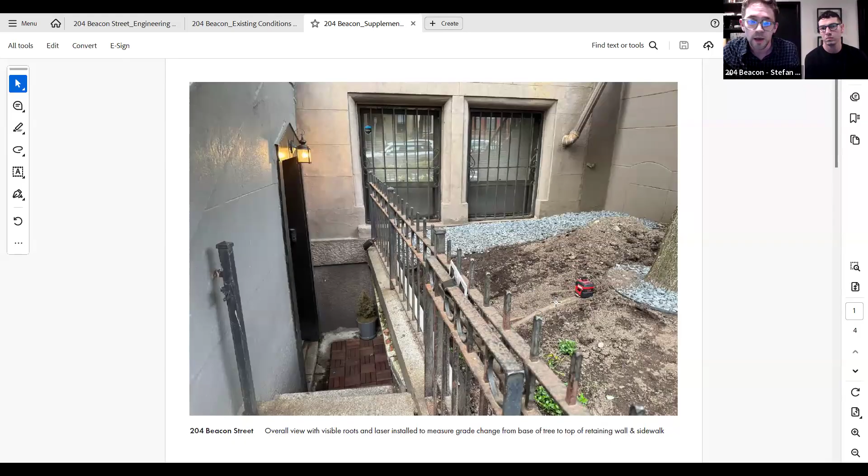After our conversation with the neighborhood association, we swept aside some of the soil to reveal the roots, because there was skepticism about how the tree was potentially contributing to the wall. We were able to identify specific roots from a larger, wide-spreading, shallow root system that extend perpendicularly from the tree's base to the wall over a span of roughly 4 feet, then hit the wall and turn to run laterally along it. We assume there may be other contributing roots here, but these are the most prominent.

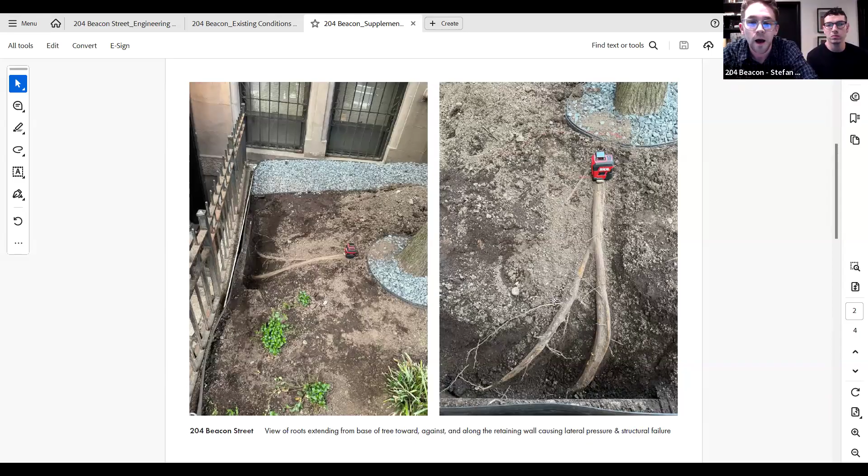Beyond that, what we wanted to identify here speaks to the original planting of this tree, which seems to have not been properly done, or over time since its planting has become neglected prior to our involvement with the condo association, moving in roughly a year and a half ago. There's a grade change from the tree's root collar to the top of the curb, to the top of the retaining wall, of roughly 10 inches, so just over 20% slope over 4 feet.

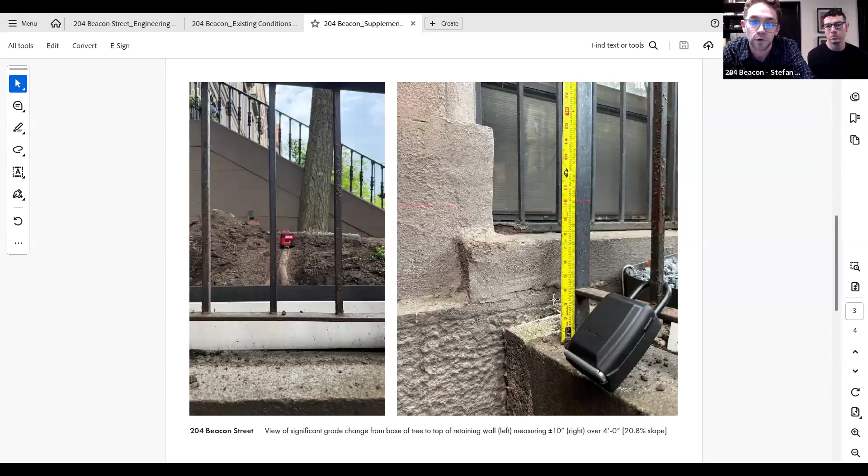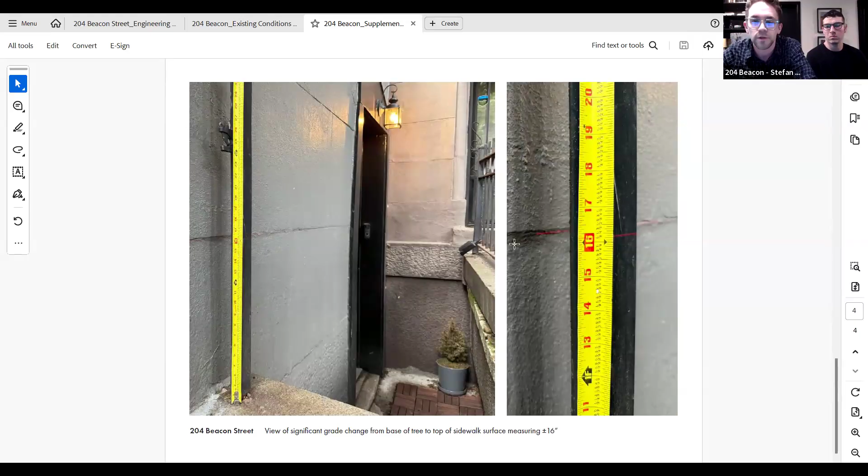In addition to seeing the roots physically touching the wall, this additional pressure we can only assume is contributing more so to the wall's failure. Beyond that, there's an even larger jump from the top of the roots to the adjacent sidewalk of 16 inches. So that was some supplementary information we thought was relevant after our conversation with the neighborhood association.

And I also want to share the video. Apologies if it's loud, I don't know how to control it. But basically, as a preface to this video, we've identified that there are some areas of existing mortar, which, in speaking with a structural engineer, were identified as being a last line of defense keeping this wall upright. Later in the video, you'll see where the most problematic area interacts directly with the tree roots just beyond.

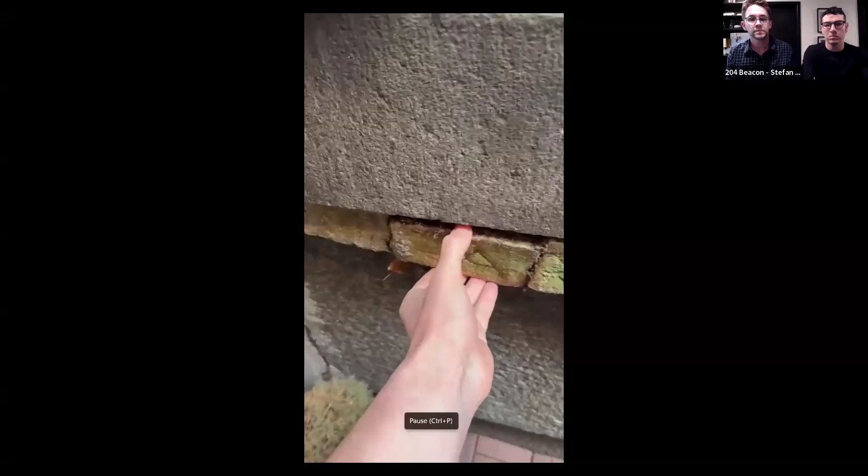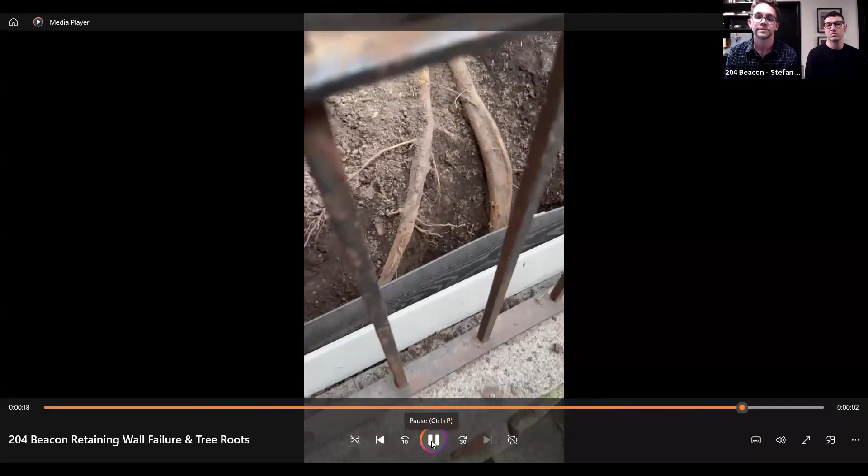Another thing, in addition to the photos, stepping back to when we spoke with the neighborhood association, we completely understand the rationale for wanting to save the tree. I think in any other scenario, we would agree that it's certainly worth pursuing.

But what we have learned in our discussions with the structural engineer and with the management company here at 204 Beacon is that, in order to save the tree and address the retaining wall, there would need to be some trenching along the length of the existing retaining wall to properly rebuild, stabilize, and restore it, and there would be a little bit of trenching at the foundation of the building as well. That trench would be cutting back—I'm not entirely sure the specific width, but it was thrown out as maybe a 3-foot path—so we'd be manipulating the tree's root system in some fashion.

In our conversations with Tyler, the arborist who submitted the quote for removal, he identified that while he can't speak to the subterranean conditions—he'll leave that to the structural engineer—this particular species and tree has wide-spreading shallow roots. Because of the dramatic grade change, a decent amount of that root system would be cut away in addition to the trenching.

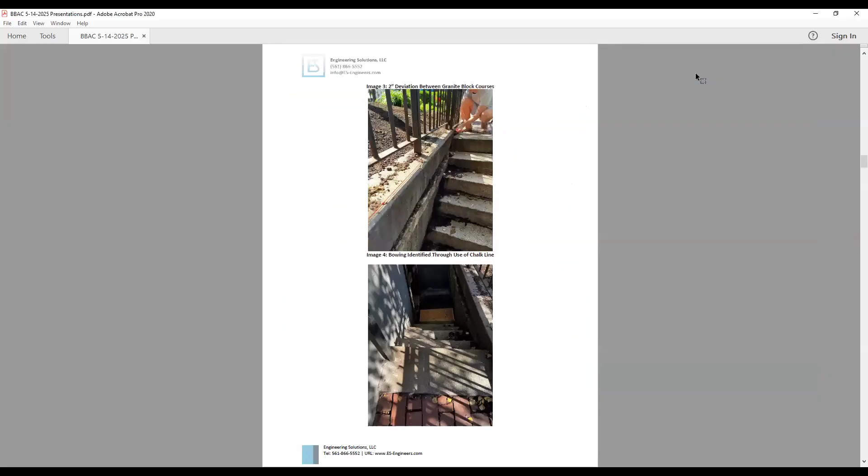And what we're fearing is, if you think about looking at a plan view of the tree, one other thing that we noticed was there is some type of waterproofing issues happening on the wall, the facade of the building itself. So we have two quadrants of the tree: one is the site wall, and the other quadrant is up against the home. So if you dig back all of that soil and possibly have to remove some of the roots.

We fear that the tree might become unstable. And in addition to that, it's already leaning towards the sidewalk and away from the house. So this is one of our biggest concerns: life safety. If during the process of trying to remove that soil, any of the roots were to get damaged, then this thing could actually collapse towards the people walking on the sidewalk.

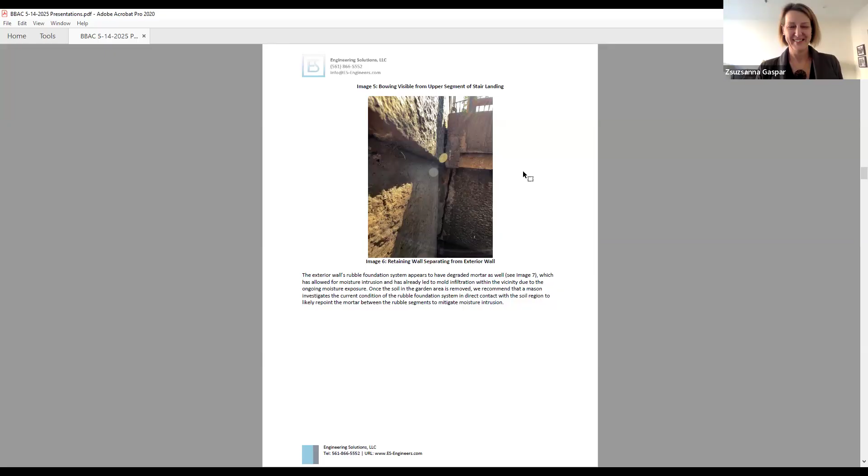Is there someone here from 131 Commonwealth Avenue, please? Hello, yes, this is Ryan Nevidomsky with Catherine Truman Architects, and we also have Adam Frost Wiley with the owner's rep. We are here for 131 Commonwealth Avenue.

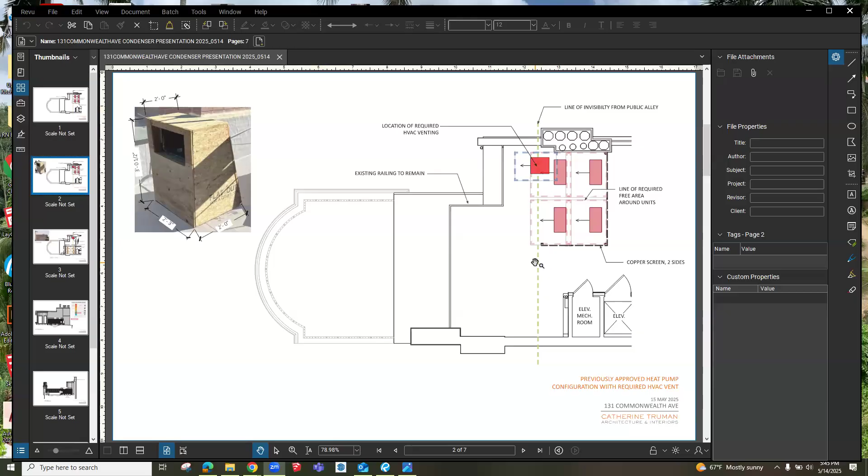Can everybody hear me okay? I apologize, I am on the road, so I can't turn my video on. But on behalf of the owner, what I wanted to do was acknowledge that we know that this has previously been before you and a decision was made, and we really don't want this to come across in any disrespectful way that we're coming back and trying again for a different approach.

What sparked this was a mechanical conflict with a vent that had to come up, and Ryan will get into this, but we had a vent that had to be placed out of sight, right in the middle of the previously approved location. This caused us to rethink, is there a better solution?

Our first thought was to go back to our preferred layout from before. With the help of the neighborhood association, we had a meeting with them last month, and we realized that coming back with our previous solution would in fact be disrespectful, since you'd already spent time reviewing this. So I really want to make the point that we appreciate everybody's time, we appreciate the process and the system in place, and we by no means would have come back if we didn't have a conflict.

I do think the silver lining may be that it works well for everybody, and most importantly we wanted to express our observation that there's a good system in place. We didn't want to come across as disrespectful for coming back with a new idea. So with that, I'll hand it over to Ryan.

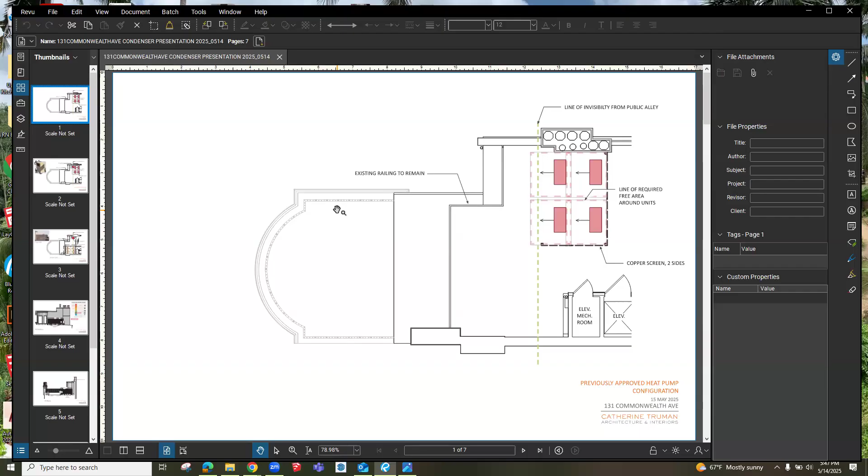Thank you, everyone. I'll be here to comment as needed. Thanks, Adam.

So previously, before we had this quad layout of HVAC units, this was what was previously approved against the east chimney at the roof deck. These were slated behind the line of visibility with a copper surround at the two sides.

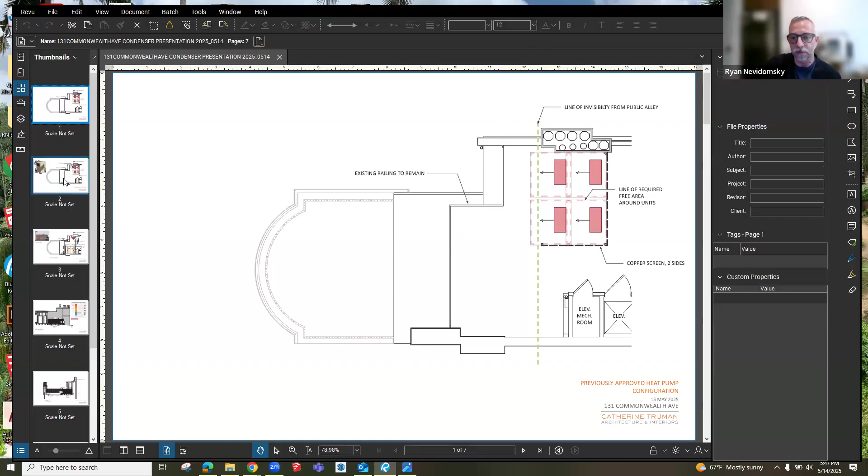What happened is, because of some of the ductwork routing and venting that needs to happen with the HVAC system, they had to come up with a roof exhaust within the clearance requirement for these units. Adjusting those to the right or down starts to impact the access to the elevator mechanical room and the elevator itself, so we needed to look at a different way of laying this out, or a different location.

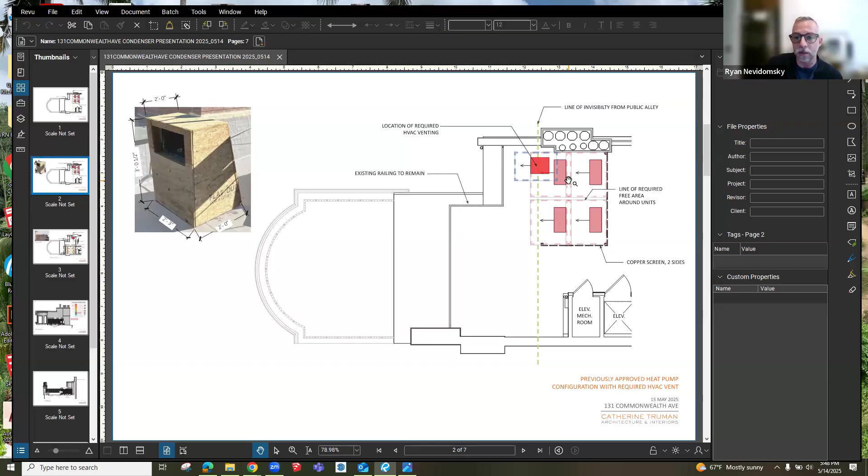What we ultimately decided to do, with a little help from the NABB, is orient it down against the west wall, again enclosing it with the same copper enclosure that is being done at 161 Commonwealth Avenue.

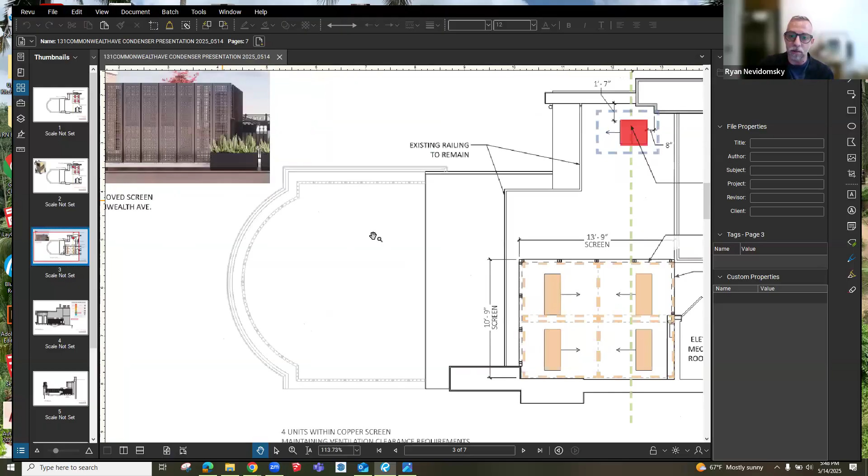This keeps it lower so it's not high and visible when you're way down the alleyway. It keeps it away from our access to the mechanical room and elevator, away from the grill and deck area we want on the other side of this deck, and away from the HVAC vent that had to come up through the roof.

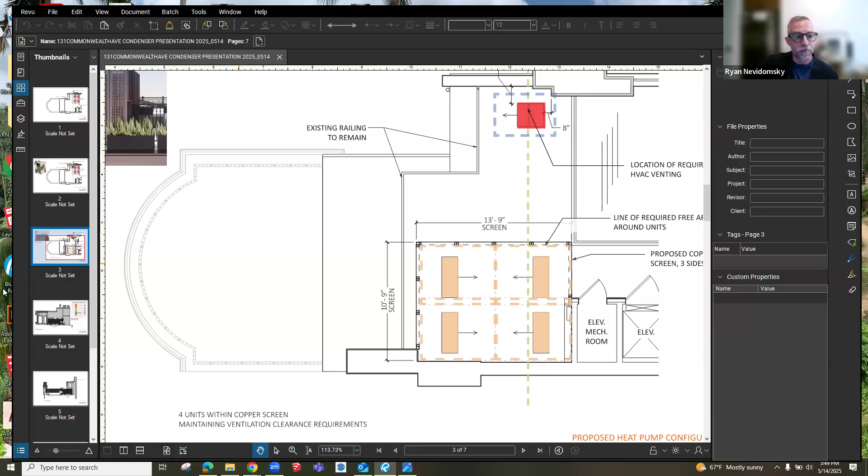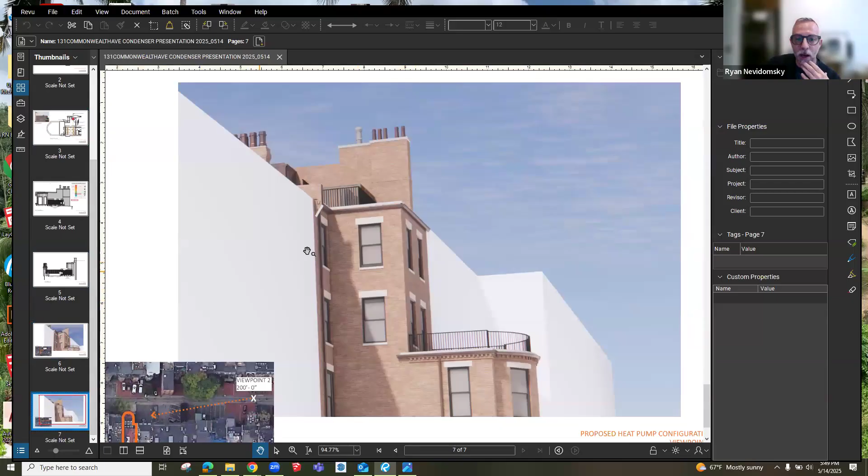What that looks like, and you've all seen the mock-up, is this. When you're actually close to the building, at 85 feet away from the back of the building down the alley, you don't even see the screen popping up above. It's when you're at about 200 feet away from the building, basically the shot Joe was showing earlier, that you do see the screen popping up above the railing back there.

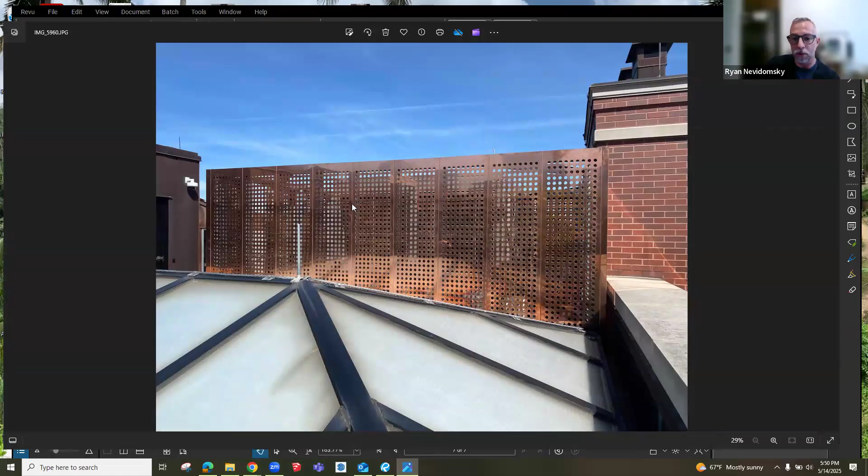This screen would be perforated copper, and it's going to patina into a nice copper color. It's perforated so you do see through it a little, but it's not too bad in visibility. I have a couple photos from the one going in at 161 — this is up on the roof, so you get a direct view of it, but it does a pretty decent job of screening and looking elegant without being overwhelming.

Can I just ask a question on that? When we approved the screen at 161 Commonwealth, Rob made a motion with provisos to make sure it did in fact screen the mechanicals so you wouldn't see them. I've taken a look at the photographs, and that screen is very see-through — you can see the mechanicals because the sky shows through it, and it's too chicken-wiry. I'm concerned the same effect will happen here, that you'll have a busy grid where you can still see the mechanicals, as opposed to a simple solid copper screen, like standing seam copper. Is there any operational reason that's not possible?

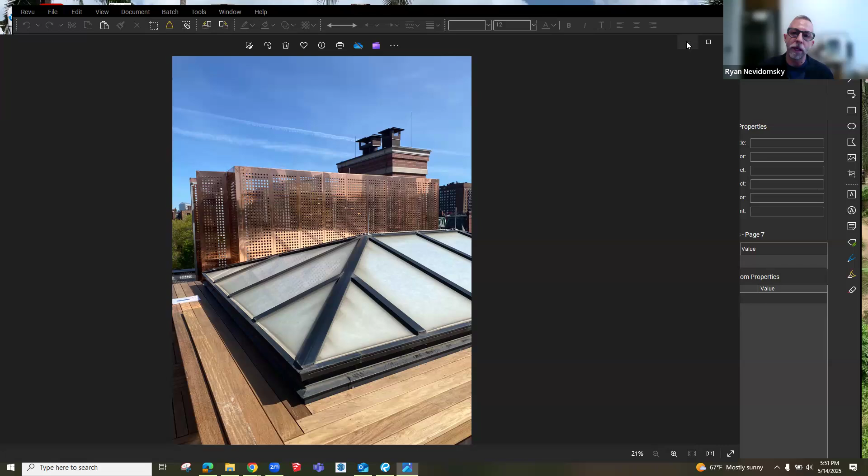So we are aware of the clearances required for these HVAC units, but the manufacturer is still requiring an openness within the surround to allow for airflow.

So the screen is lifted up off of the membrane roof by, I believe, about 18 inches, might be 12 inches, which helps with the airflow, but they still are requiring a bit of openness within the surround to keep the airflow going for these units.

Can you design it in a way where it's a little less see-through? We can look at the options of what we can do. We can talk with them about possibly reducing the amount of perforation, and we can also look at doing a different type of openness. Maybe it's a vertical channel every so often, so you still get a more solid appearance. Or maybe it could just be some sort of mesh behind the perforations that still offers air to come through, but darkens up the appearance of whatever is behind that screen.

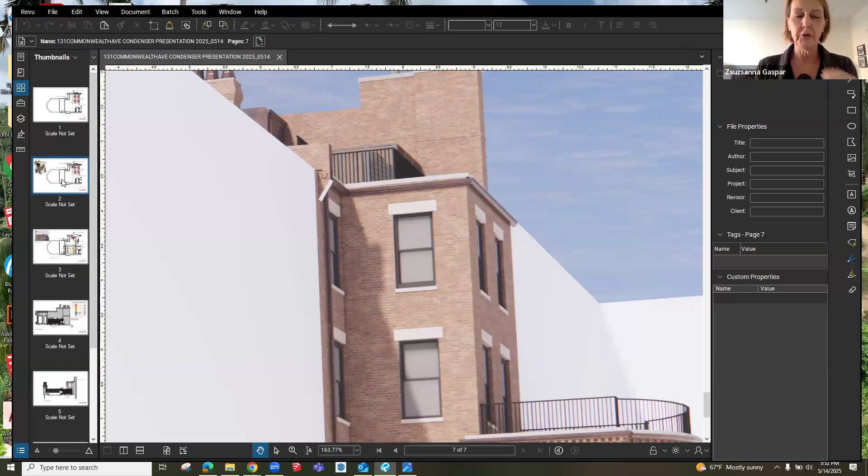Would it be possible—I was just looking at your layouts, and the clearances for the two lines of units are actually touching, they don't overlap. Would it be possible to push them closer to each other so that the clearances overlap? That would mean that you could make the screen a little bit more solid.

I also have to admit, Tom, I don't find it terribly chicken wiry, and I think because here you will have the brick behind it, you will not see through to the side that much. And the railing in front of it. Yeah, that might make a difference.

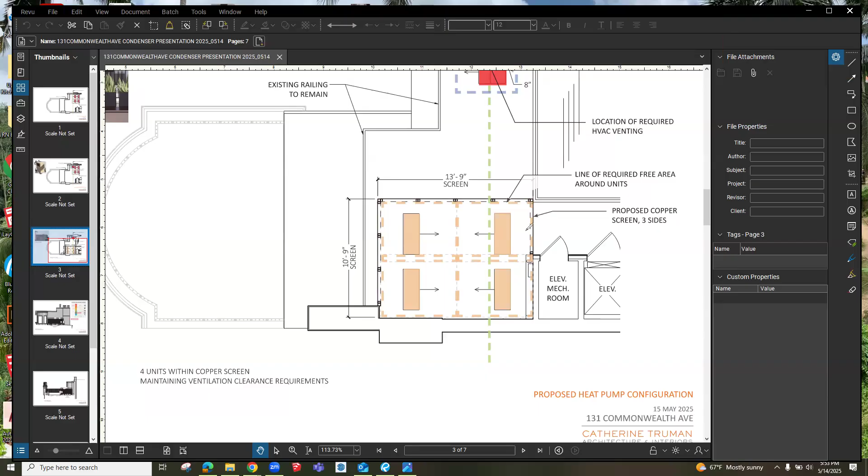Absolutely. Yeah, the other thing I want to add, and I think Serge pointed this out, coincidentally, the existing railing does a good job at screening the screen, if you will. So this situation is a little bit different than 161 in that it is much shorter, and to your point, we'll never have the sky behind it—it's always going to be that brick wall. And I think the black railing also helps to provide additional screening.

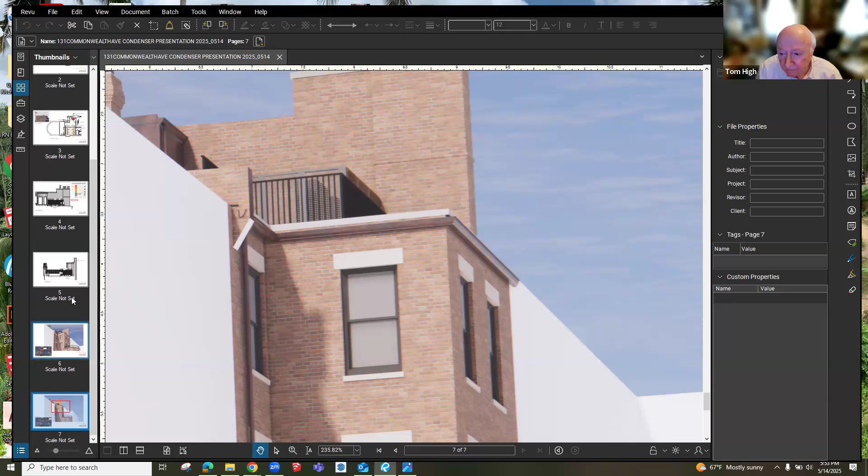But to that point, I'm all for working with Ryan and the manufacturer. I think the simplest solution would be, if we're allowed to, add some kind of black screening behind the copper that would further block the view. That was my first thought to research, and we're happy to do that.

So to answer your question, Zsuzsanna, we cannot actually go in this direction with the units any further. Those are the directions that the units are blowing, and you can't impede their blowing on each other. So that's the minimum that we can put them together. So it's not like a pulling of a coil, right?

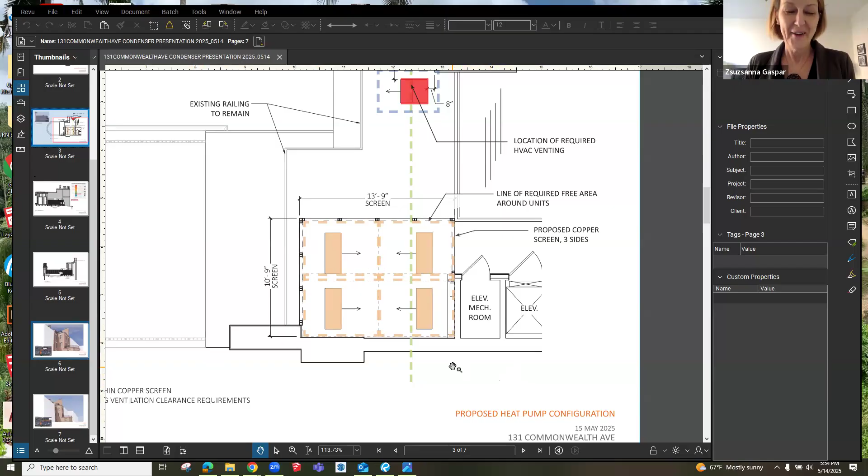Okay, I understand. I think even with this configuration, I'm comfortable with the perforation that you're showing, because there's such a tall brick wall behind it. But I might be the only one on the commission, so just put that one forward.

Well, I think it's good if they could take a look at it, and perhaps that's something we could ask them to do and have it approved by Joe, because I think that's right. With the brick behind it, it's going to reduce the see-through character, but I'd still like to see what else they can come up with. Right, that makes sense.

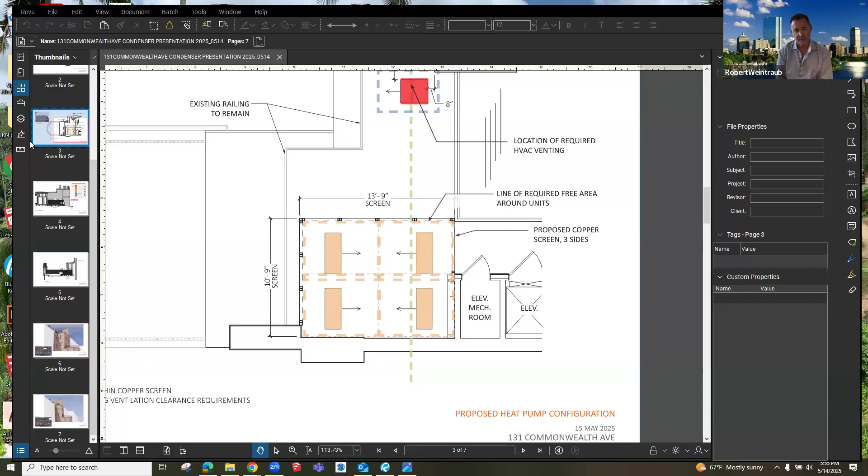Any other comments, commissioners? I'm ready to make a motion. Okay, great. Then let's go to public comment.

All right, I'm just going to need to share my screen. So if you could stop. Oh, sure. Sharing, Ryan. Sorry. That's okay. There you go.